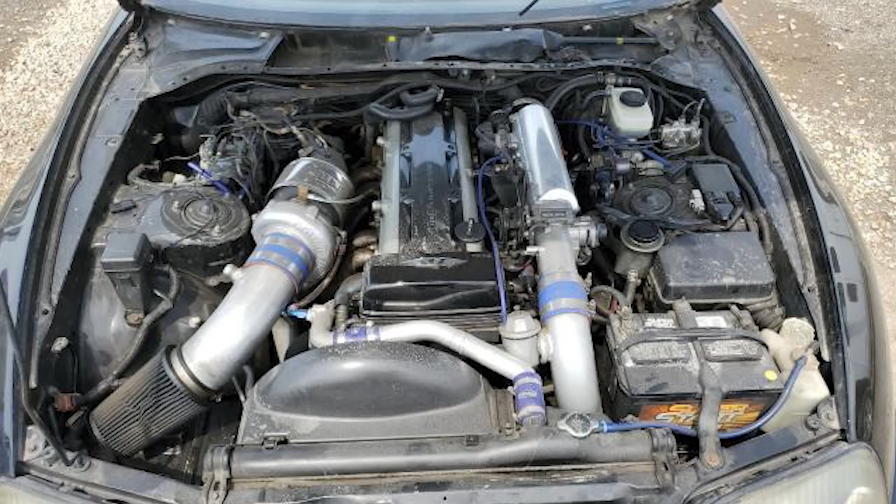I saw the photos of it online and I was like, that has a bunch of really good parts on it. But here's the thing with buying Copart cars. You don't really know what you're buying. You can't really get a good idea of what's wrong until you get it in person. I spent $50,000 on this car, which is way too much for a single turbo automatic Supra. I started taking it apart, I went all in, and I lost it all. It absolutely marks the biggest L I've ever taken on purchasing a car.

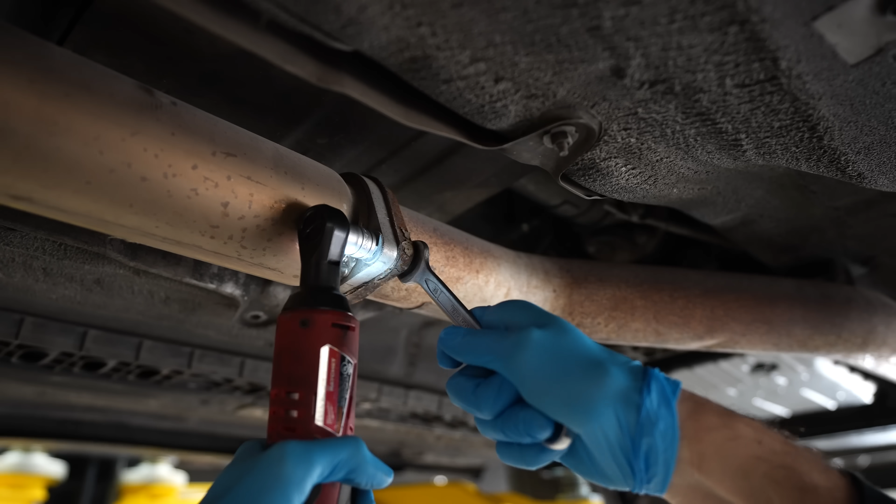I'm gonna rewind the clock all the way to the start of this morning when we began tearing the Supra apart. Big spring guy. Oh, this was there. It goes. Oh, that scared the shit out of me.

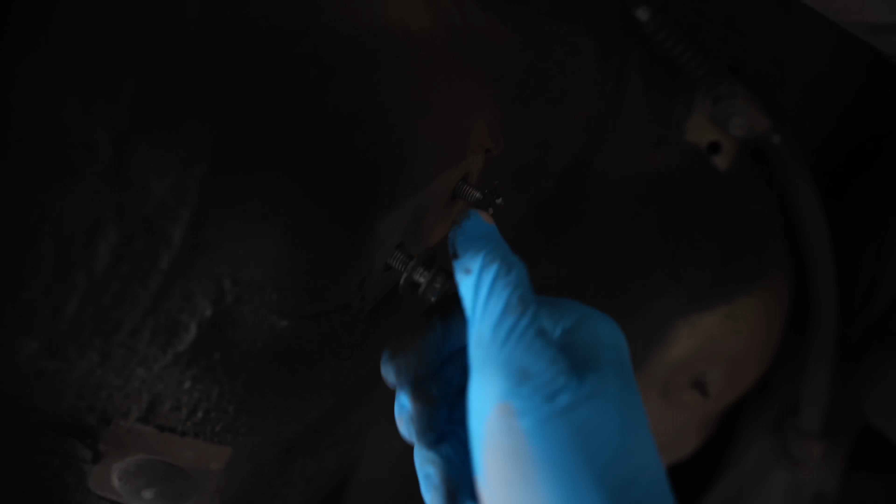My favorite tip trick of the day: when you remove bolts for braces, always put the hardware back in all of the threaded spots. It's an easier thing to do rather than just bagging them and putting them to the side. That's a great way to lose hardware. This is something I've been doing for the past few years, and it makes putting things back together so much easier.

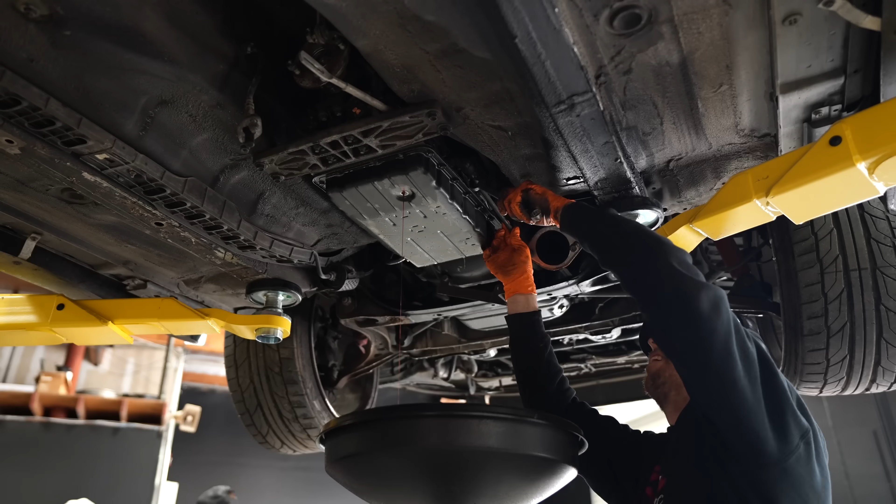Now that the exhaust and the drive shaft is removed, it's time to move on to the automatic transmission. Removing an automatic transmission is actually quite different than removing a manual transmission. Normally, you'll find bolts on the back of a transmission that connect it to the back of the engine, but with an automatic trans, we have to focus on removing the torque converter first. So you'll find there's a window that has bolts, and we're gonna be rotating the engine, accessing all the different bolts on the torque converter, and then remove that, and then the automatic transmission can come off.

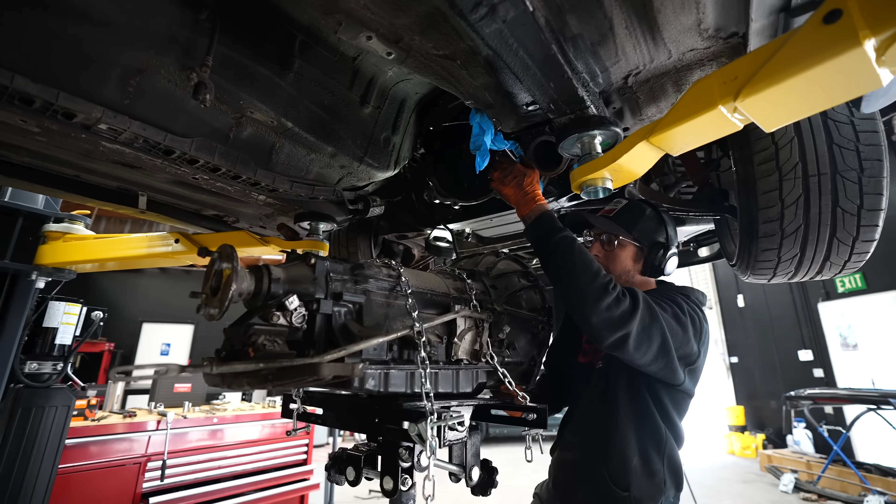Now with the transmission out, we're gonna go ahead and focus on removing the engine. This is gonna be the fun part. As you guys know, this car was a gamble. There was a big risk involved with this car because we way overpaid for just an automatic Supra. The engine bay looked like it was littered with valuable pieces, which could lead to potentially a motor that was built or at least had some good parts on it. And while we were pulling out the automatic transmission, we noticed a few things that caught our eye.

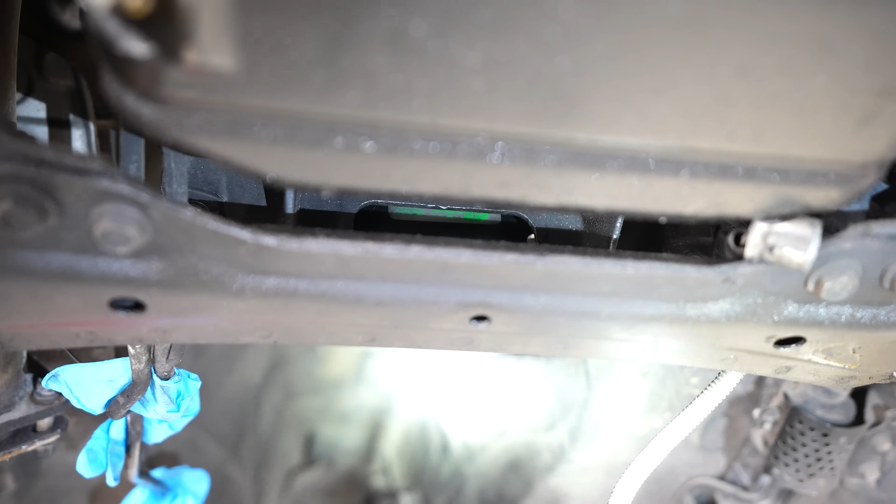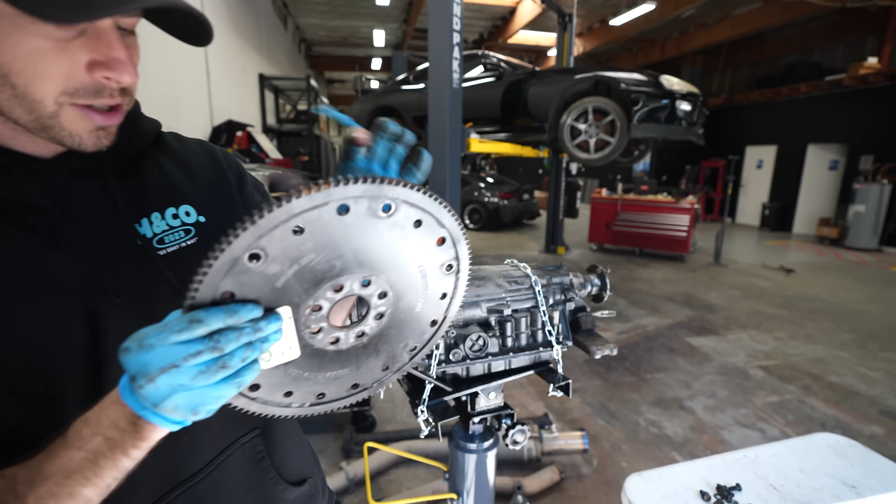See that green sticker right there? That's an SFI sticker. That to us means race parts. So this is the sticker that we saw, and it's an SFI. It all has to do with safety spec, making sure that things are safe to race in certain organizations, etc. But also, you'll see atfspeed.com. Now that to me doesn't look like a stock part. And it has us thinking, maybe this could be a built transmission.

I don't even know what a stock Supra automatic looks like. I don't know if this is one, maybe it's not one. I'm sure you guys will let us know down below in the comments. We're gonna have to do some digging online.

But what it has me thinking is maybe the other buyer on the other end of the bidding war knew something that maybe we didn't know. Maybe he was a friend of the owner of this Supra, or maybe he was involved in potentially building it. But it is a little bit fishy to think that someone would bid all the way up to $50,000 for a burnt down single turbo JZ.

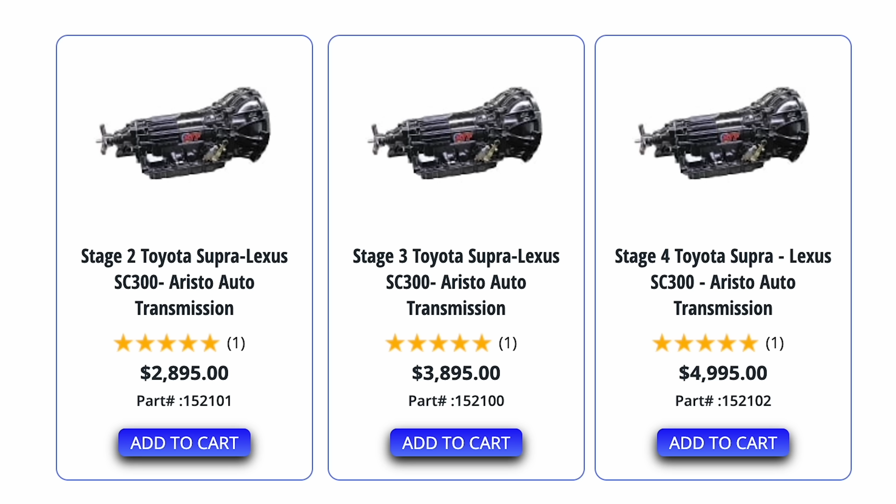So after looking up atfspeed.com, after looking at the flywheel, we noticed that they also sell transmissions. One of the first things on their homepage is a stage 4 Toyota Supra auto transmission selling at $5,000. And it comes with a bunch of internal pieces and it's rated to 1,300 horsepower.

Now I can't find any ATF Speed branding on this transmission, but what has us curious is the transmission that they sell is painted gloss black. The same gloss black that this transmission is coated in. I'm gonna call them right now to see if I can get any information if their transmission comes with certain stampings or any type of physical things that we could see on the transmission to verify if it is from them.

Good afternoon, ATF. Hey, how's it going? Good, how can I help you? Good, hey, I'm calling because we have an automatic 2JZ Supra and it looks like it has your trans in it. It has your flywheel on it and it has the ATF Speed on it, so we looked you guys up. But I was calling to see if there was anything labeled on this transmission that we could see physically to clarify if it's from you guys, or do we just have to take it apart to see what internal bits are inside?

You'd have to take it apart to see the internals inside. We pretty much don't mark them any longer. We used to mark them with an ATF sticker, and the stickers wouldn't stick to the new paint that we got, so we stopped labeling them. Okay. And the paint is just like a gloss black all the way from front to back? Correct, bell housing and all. Okay, do they all have the J3 stamping on the top, or is that maybe something that you guys provide? No, J3 is the type of bell housing that it is. Okay, got it. And then do you guys recommend running a trans cooler with this setup?

We do. Yes, sir. Now this is big news for us because our Supra already had a trans cooler installed on the car. So odds are, if they recommend it and our car had it, it could be an ATF Speed transmission. Yo, that's kind of good news. We didn't want to take the transmission apart, but now we have to. So if we can find built pieces inside, that will clarify if this is a built transmission selling for $5,000.

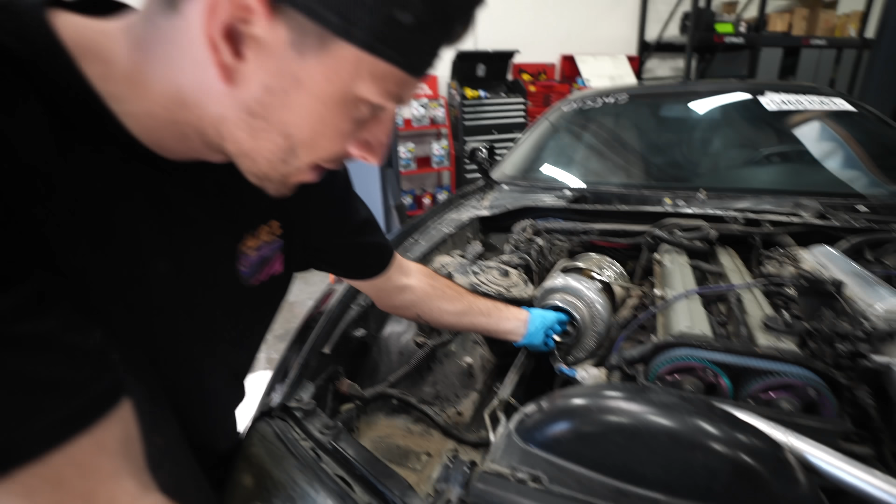So we're noticing as we start pulling stuff apart that there's quite a bit of excess oil. So this had quite a bit of blow-by, which you're probably saying, well, where's the catch can for this blow-by? Well, the catch can was removed from the car when we got possession, just like the ECU. Ian was looking at the layout of where the catch can probably would have been. It would have been somewhere in this corner, which oddly enough comes right through the ABS. And if you look at the ABS, some of the lines are disconnected.

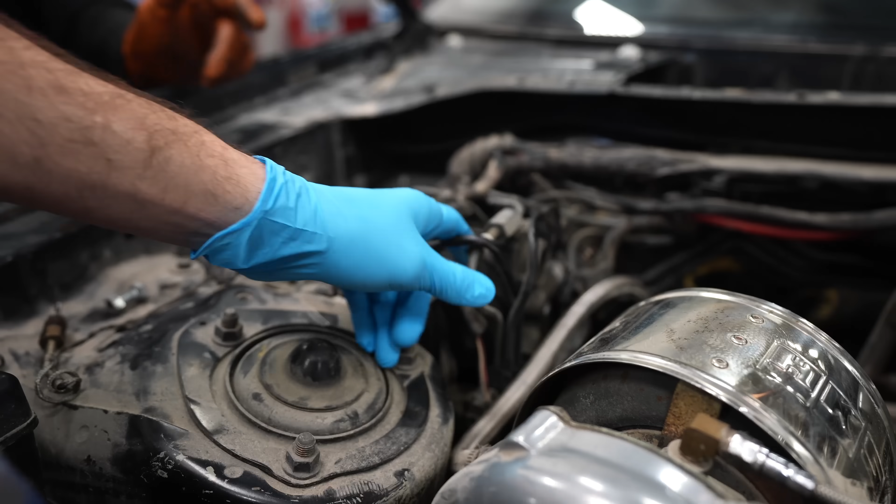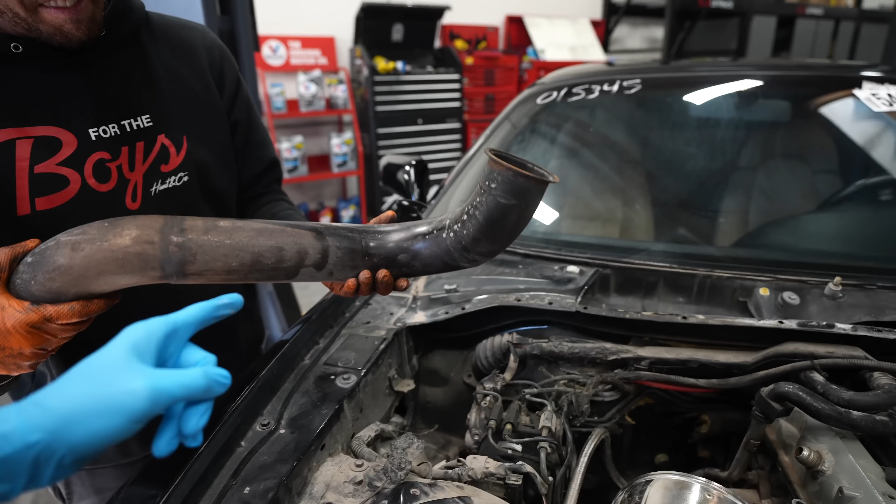So our theory is the catch can line burned through, and that's what touched the downpipe, and the downpipe caught fire. Or maybe in the most extreme case, there was so much blow-by that the reservoir overfilled and then started leaking down and caught something and then exploded. There was oil all over this downpipe, there's a lot of blow-by. That's our best guess so far, but we'll keep digging and see if we can find anything else.

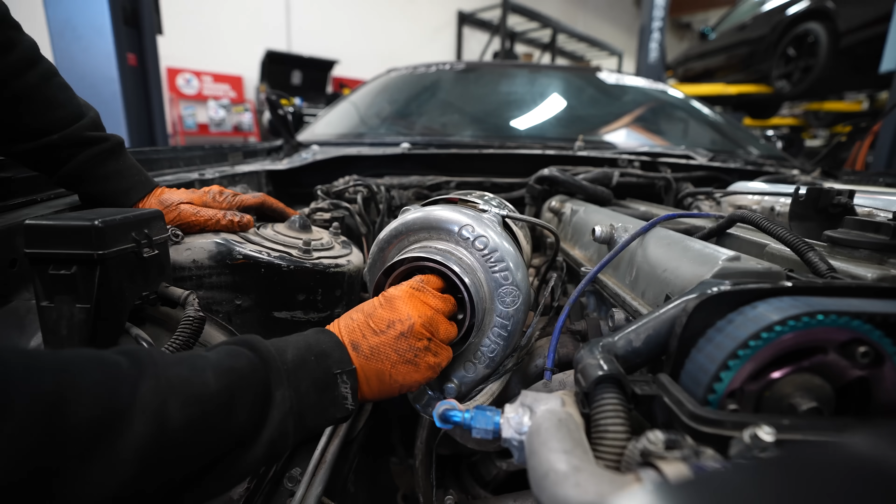Oh boy, oh, look at that run down like a little waterfall. You don't want that, I can tell you that much. But I do love that all the AN lines are fitted and welded on there. It's cool to see that. We can probably reuse some of these AN lines. I want to try and reuse as much as possible on this car. I think it'd be cool to have as many original parts. Obviously, we're gonna build it and make it better, but it will be cool to see some of the older parts still coexisting with the new parts.

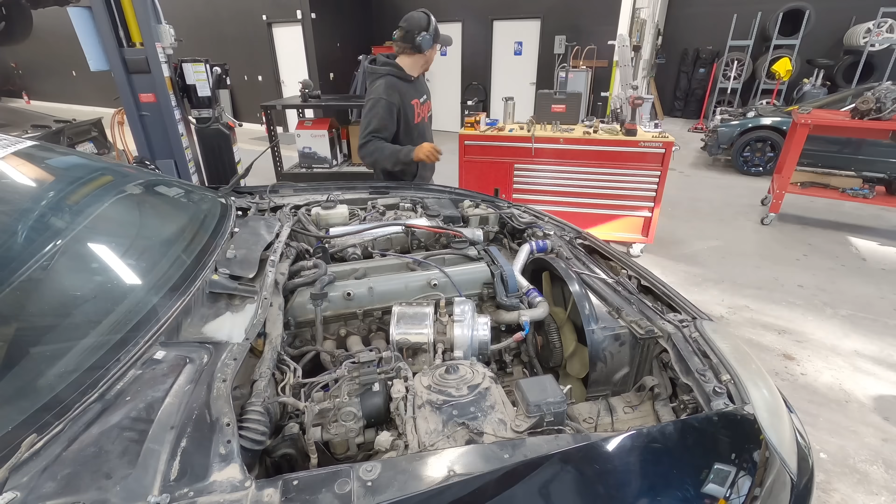Remember in the intro of the video, I said that I've been doing this for 10 years? Well, I'm actually not joking when I say that.

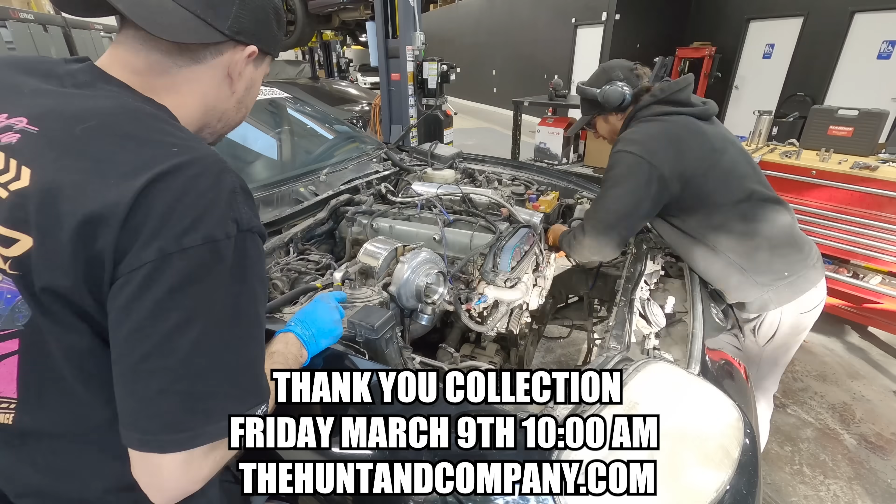Now with the engine coming out, we're gonna be able to see a lot more of what potentially happened and where the fire started. Look how big that wastegate is. Oh my God. I've never seen a wastegate that big before. That's crazy. That's 2000s right there. That's tight.

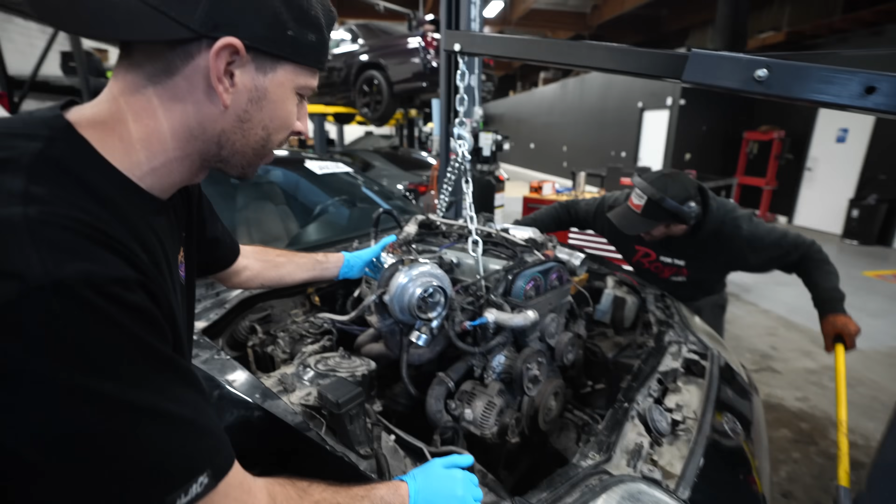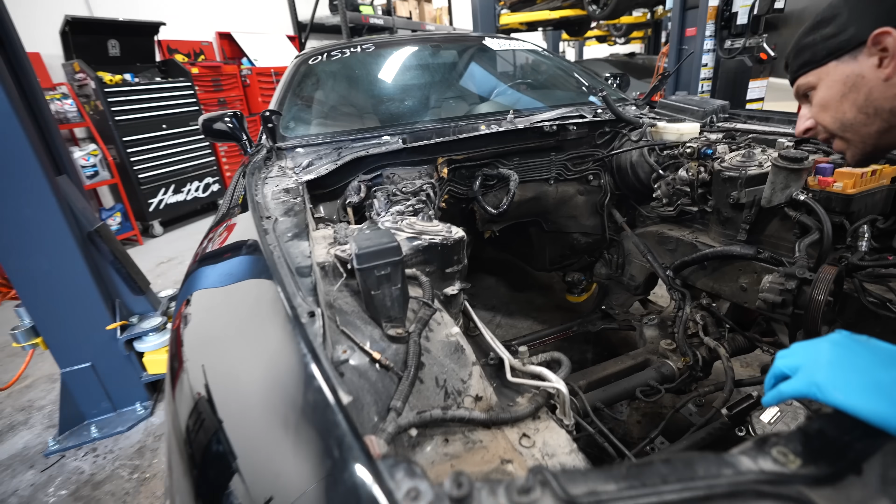You all right? Yeah, we're good. Yeah. Oh. Yeah, how's it looking over there? See anything more? No, I mean, lines are all still good. She's cooked. Yeah, it's just a matter of now time to clean up all the mess. There's a lot of char in the corner of that engine bay. So we're gonna wipe all that out, clean all the stuff. It'll give us a much better look at the condition of this bay.

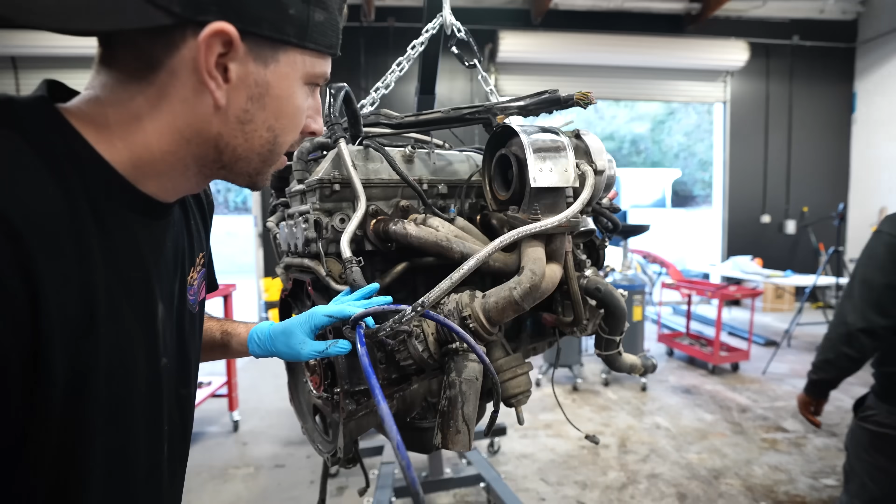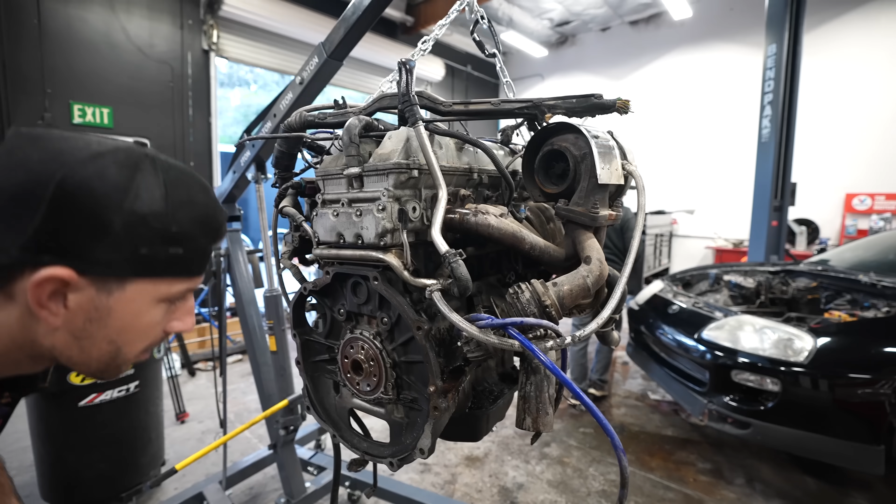And then as far as the engine, with just like the first glance, I think our guess of the catch can having some sort of leak is the source of the fire, because there's no holes, there's no pinches. Oh my God. Yeah, that's smoked, bud. Rear main seal, looks like it's been recently replaced too. Bet you when they did that trans job, the rear main seal got done.

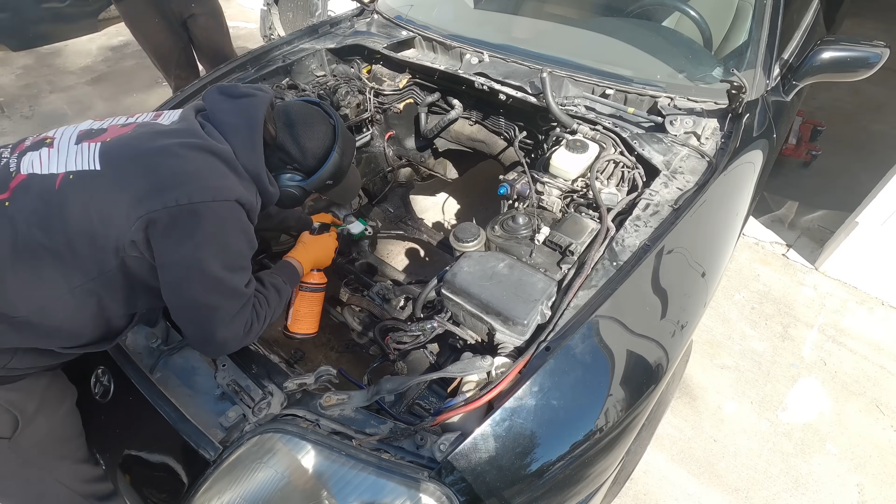With the engine out, we're gonna go ahead and clean the engine bay just to get it back to factory looking, because it's full of junk and ash. While that's getting cleaned, Ian went ahead and started disassembling the transmission, because if you remember earlier, we suspected that we could have a $5,000 stage 4 transmission, which would be a huge win for us.

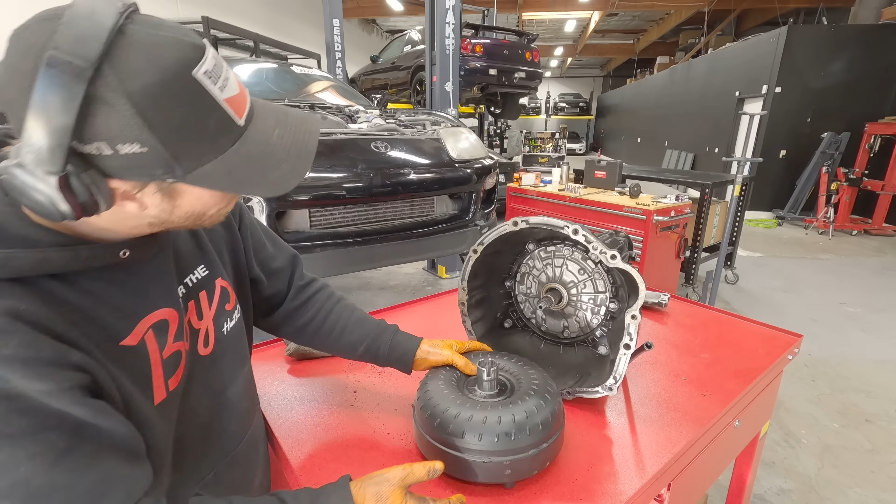As he was disassembling it, he was soon to realize that this was not filled with the billet internal bits that we had hoped for. Maybe it's their stage 2 transmission. We're not ultimately sure, but we are gonna figure that out and we'll keep you guys updated with that.

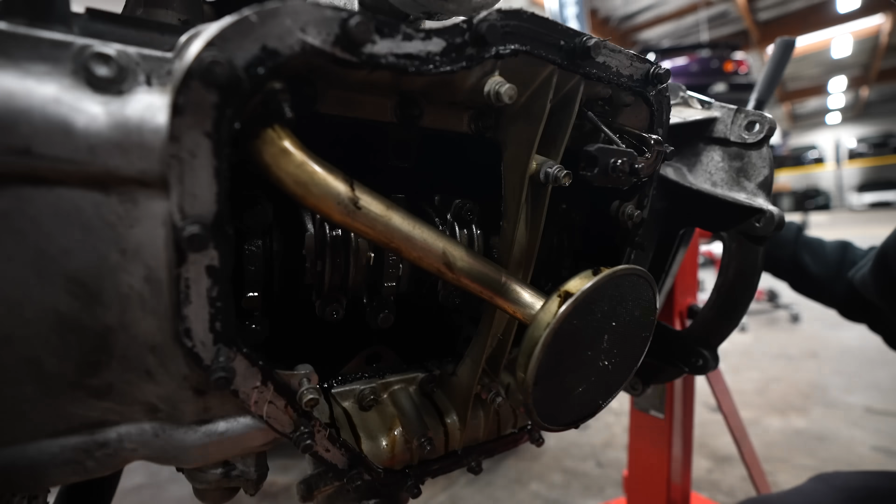But to make matters worse, while the engine was out, we went ahead and did a leak-down test. Now, our air compressor was not hooked up at the time, so we did not use this for our leak-down test. We actually just rotated the crankshaft and used our ear. And what we found on cylinder 6 was about the worst thing we possibly could have imagined.

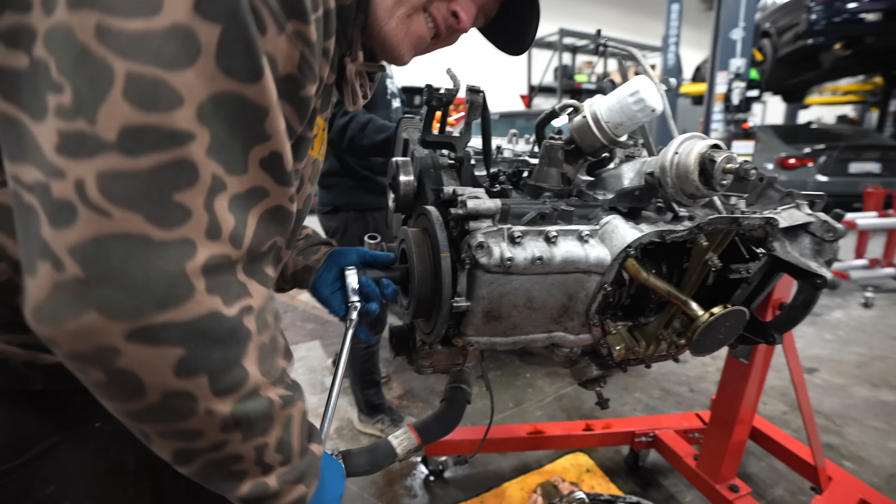Yeah, normal. Gives me a good fight. Nice. Now cylinder 6. Now it's cylinder 6. 2. Damn. Ew. 2. 6. 6 is 2. Weak.

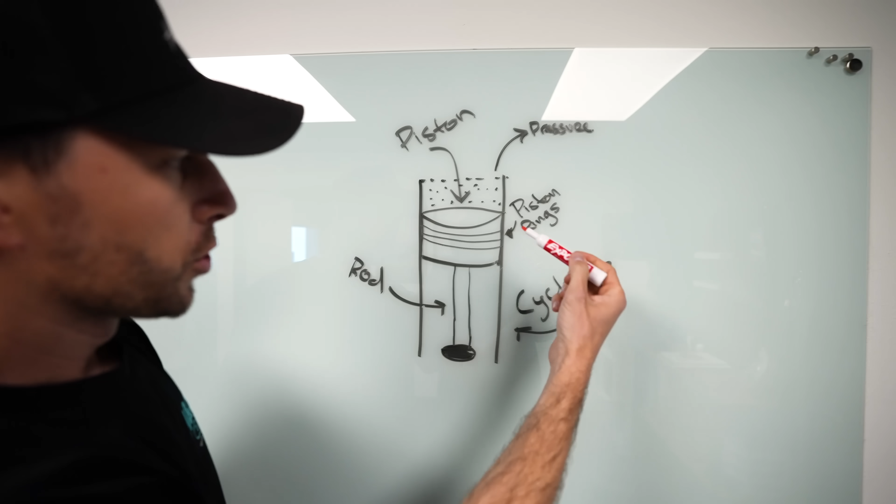Now, if you're not following along, let me try and explain this to you. Here's a drawing of a cylinder with a piston and rod. You have your piston, you have your rod, you have your whole entire cylinder, and you have your piston rings. When the crankshaft is rotating, the pistons are going up and down between the cylinders. When that is happening, there's pressure being built within the block.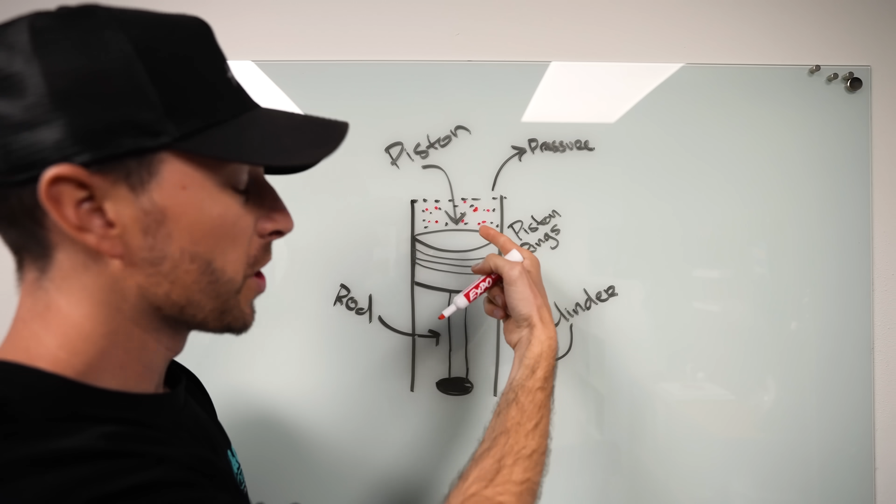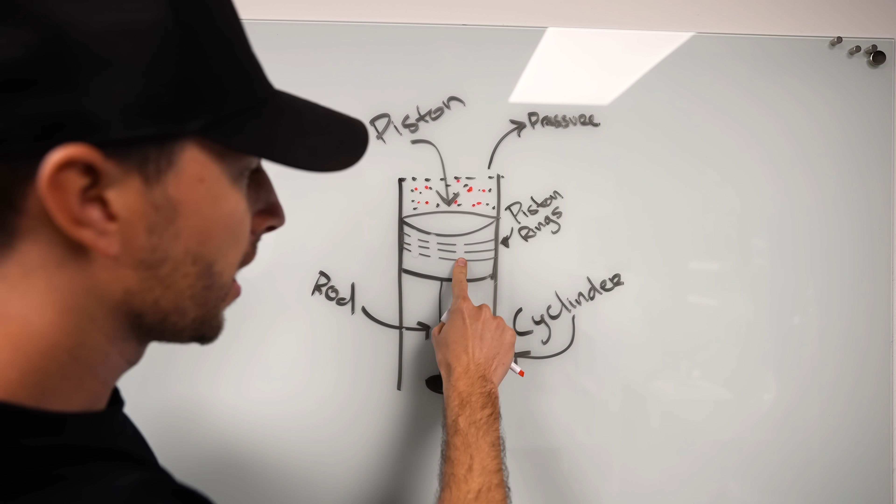If the compression is consistent and even upon all cylinders, you have signs of a healthy motor. But if you're getting low compression on any of the cylinders, that's not a good sign. It is really common to wear out the piston rings on the piston, and when doing this, it creates less pressure within the cylinder and the piston. All of the pressure is escaping through the piston and going throughout the cylinder. It's gonna read a lower number than other cylinders that aren't having this issue.

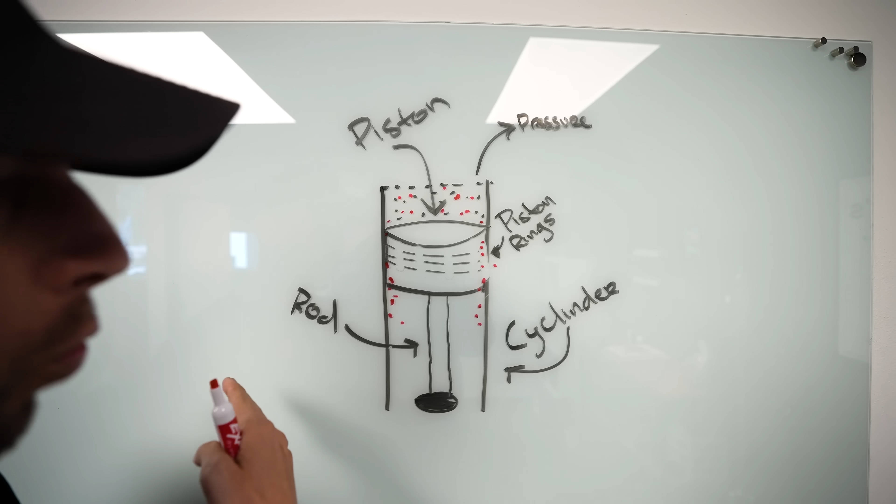When rotating our assembly, you can audibly hear on 6 that it does not have the same pressure release when the piston is going up and down throughout the cylinder. So now we're gonna take apart the head from the block and we're gonna try to see what cylinder 6 looks like. Odds are, it's not gonna look too good. Yeah, so essentially cylinder 6 has very weak compression. Because we're getting weak compression, we know that there is a malfunction, for lack of better words.

This whole car was a gamble. Having what we found so far has been great. And then we come to the engine and we were hoping everything would still be great, and we have found what we think was actually the original cause of the fire. Because as we originally said, we think the overflow got too full because there was so much blow-by throughout all the intercooler pipes that the overflow got so full that it puked out and then started dripping all over the downpipe, which then caught the harness on fire, etc.

But now we're taking it one step farther and noticing how weak cylinder 6 is. That was probably creating all of the blow-by, which then filled up, which then spilled out. So the original cause of the fire was because cylinder 6 said see you later. It's a surefire way. Yes. Now we're gonna double down for the engine, but it's gonna be more work and more time. So let's pull the head off, let's inspect the piston, and see what it looks like.

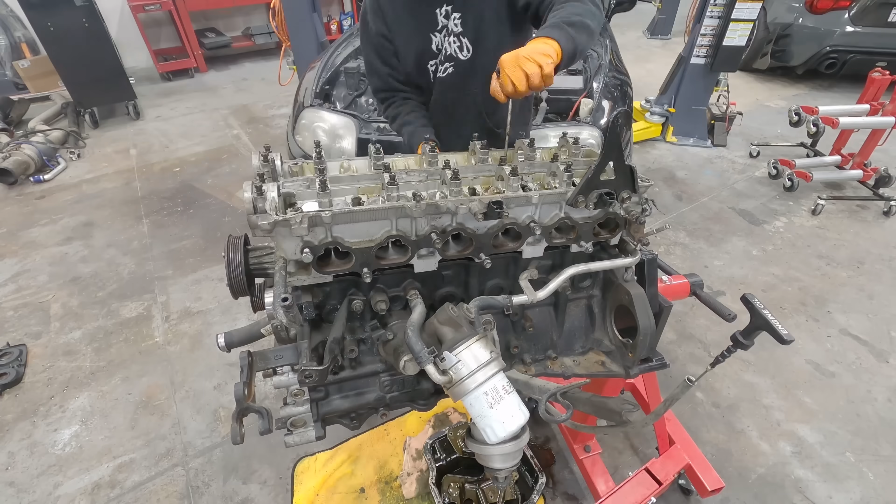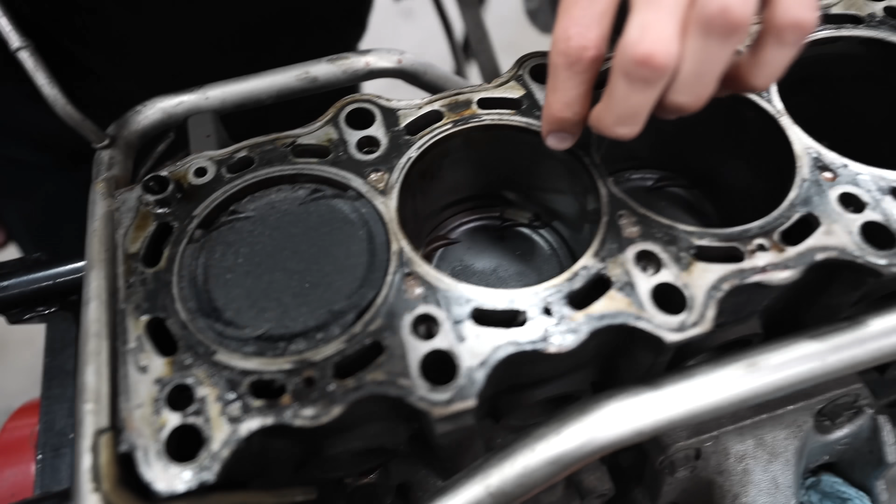Damn. Wait. Oh no. Oh. That's bad. Wow. So not only cylinder 6. Oh my God, I didn't even notice. Oh my God. That's that bouncing around in there, making those dimples. There. It literally goes chunk, chunk, on every single cylinder. And there's our worst one.

Yeah. Alright, so I have to lift this up so all these buckets don't fall out. First and foremost, studs are stuck in the head. Yeah. So it's probably warped to some extent. Find me the worst cylinder. Whoa. This cylinder's really grimy. There's also a lot of contact. Oh my God. So it needs head work. It's just too expensive. Do you want this on or off camera? You can leave it on camera. New motor.

You can salvage a lot of this stuff, but the amount of work, I talked to Ian about it, way more knowledgeable than I am. You have to weld all that up, machine it down. Some people say it messes with the heat treatment of the head. So at this point, we're down a head, a lot of boring and honing on a block. I mean, it might just be easier for us to go VVTI at this point because we still have time to call Pro Wire. We have an impasse now, a fork in the road. Do we want to go full big bad built, non-VVTI? Do we just want to go stock VVTI? We have time to make the decision, but this motor's not getting put back together.

The gamble has run out. Triple down, you're losing more. We tripled down. And I lost. And that is the story of the biggest financial loss I have ever taken on a car. Now, to put this in perspective for you, all we have at this current moment is a Mark IV Supra with interior and no motor. Everything else is trash. There's no ECU, there's no motor.

You can buy a Supra that's NA and automatic for roughly $30,000. Now remember, I spent $50,000 on this. This car with no engine and how it currently sits is probably worth under 20 grand. That's $30,000 that is lost. Poof, gone. Now I'm laughing because that's the only emotion that I know how to show. Now it's time for us to do what we do best, and that's save this thing. I don't know how, but I gotta start with a whole new engine.